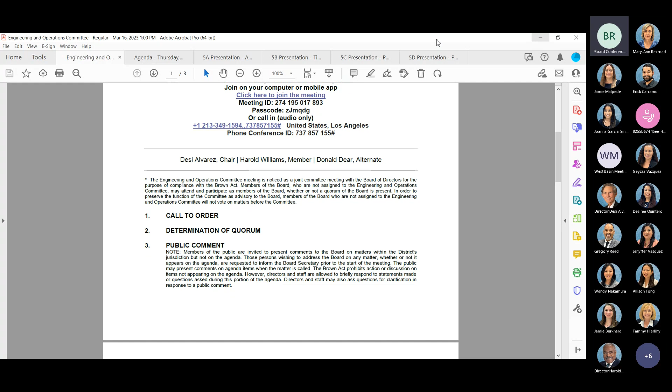Okay, and I do want to acknowledge that we have Mr. Greg Spiker from PV Golf Club here today, and he's prepared to make a public comment. But he's also anticipating a couple of his colleagues to join us today. So if it would please the committee, perhaps we can postpone those public comments for the agenda item that they're here for, which is the PV lateral recommendation to award.

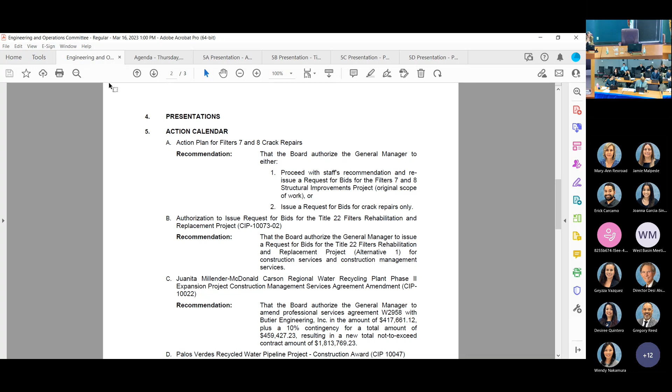Mr. Chair, yes. I'm sorry, but I'm not able to hear you clearly. Oh, okay. Can you hear me better now? I don't know what the speakers are doing. Okay, I will speak louder. Would you speak into the mic then? I don't know. Like this? Speakers in the room? You're supposed to work. We don't have speakers in the room, so that's only for online. Oh, these are online? Oh, okay. So then I just have to speak louder. Fair enough.

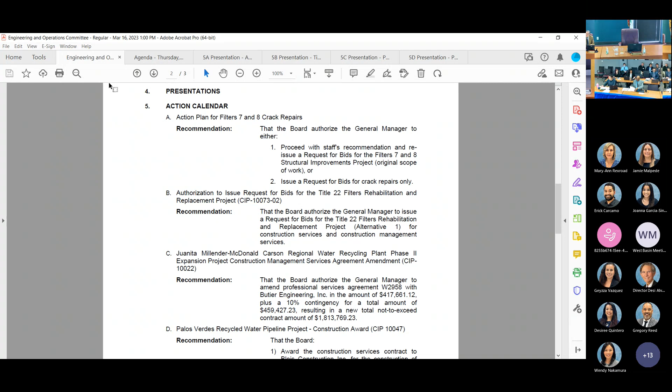With that, we'll move forward with the Palos Verdes Recycled Water Pipeline project, the construction award, and our General Manager will introduce that item. We're going to item 5D, is what we're saying? Yes. Okay, and I don't see Mr. Ralph Felix here, but we'll go ahead and move into that item. So we have Veronica Jovia, our project manager for this project, who will give the presentation as well as the recommendation to award. So please, Veronica.

Yes, good afternoon, Chairman Alvarez, members of the committee. I'm here to present an item that you can find on page 153, item 5D. This is for the Palos Verdes Recycled Water Pipeline project. Please note that this particular board item has 3 action items on it. One will be for the construction award of the pipeline. The other will be to request an increase for budget, and the third will be basically the approval for the advertising of the pump station project.

On past meetings, we have been presenting these. Sorry, what page are you on now? It's page 153 of your packet. 153? Yes. Thank you.

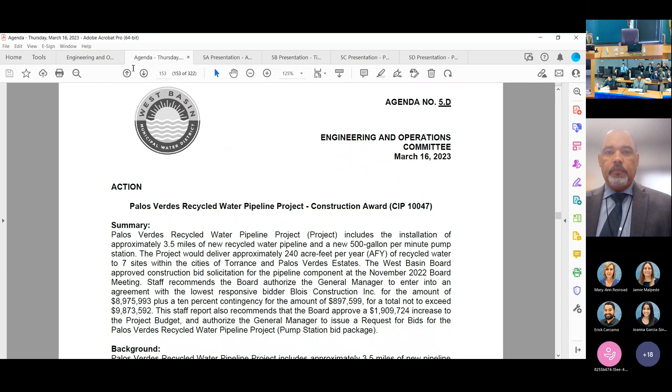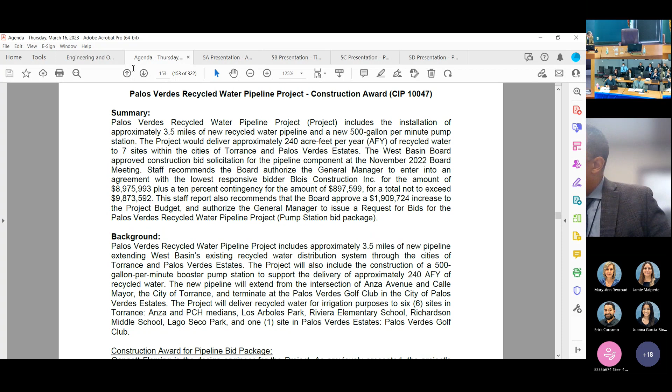And during the past presentations that we have done as part of the board committee, we have been presenting some of the logistics that went through the bidding process. So on these items, to make sure that we move on time, I'm just going to concentrate on the results and the following action items. However, if there are any questions, please feel free to let me know, and I can go back to those logistics.

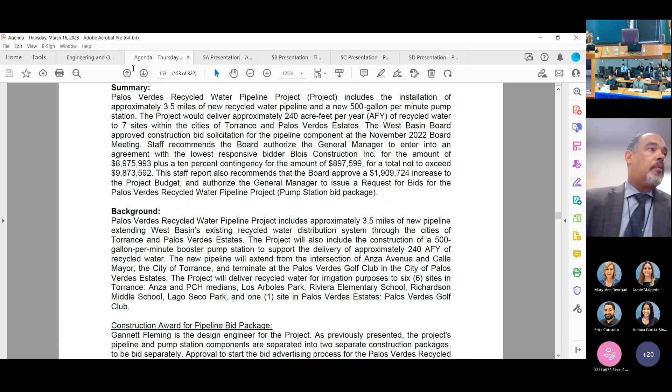We went through the process of obtaining bids on February 14, 2023, and we received 3 bids that you can find on page 154, table A, which summarizes the 3 bids that were received. The lowest responsive bidder is Blois Construction at $8,975,993.

Their bids were reviewed and checked for any errors, and they were deemed a responsive bidder. We also reviewed the other bidders' items and found that College & Sons was missing the local business enterprise form, and therefore they were deemed non-responsive. The $8.9 million project that Blois Construction produced is still

$1,736,113 greater than the original construction engineer's cost estimate, which was $7,239,880. So with this, I'm going to ask you to go to the PowerPoint presentation and go over some of the items the committee asked us to look at last time, then go back to the board item to continue this conversation.

The presentation can be found on page 158 for those in the audience. This PowerPoint presentation goes over the items our committee asked us to review during the analysis of why the cost came in higher than estimated, as well as some of the other funding mechanisms we have for the project, and other considerations to see if we could cut budget.

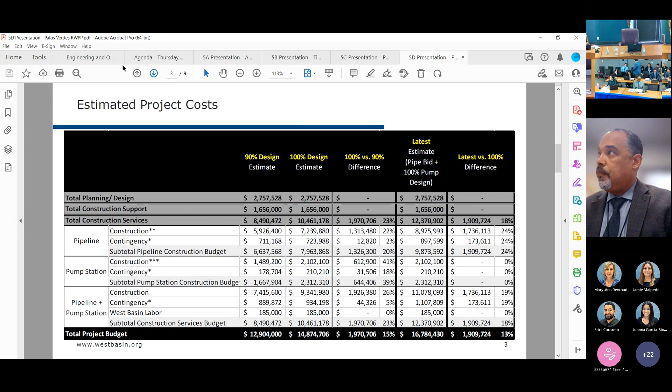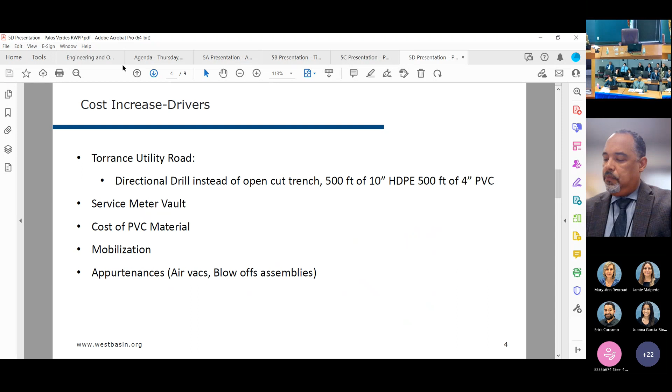Moving forward to the next page, please. We also took a look at other considerations for how we could reduce or cut some of the cost of the project. We looked at the laterals coming up from the main pipeline that takes water from the existing recycled water line to the end point in Palos Verdes Estates. We looked at two laterals, 4-inch service lines, which together cost a little over $800,000 just taking into account the PVC pipeline. These costs do not include mobilization, as mobilization percentages are also a component of those.

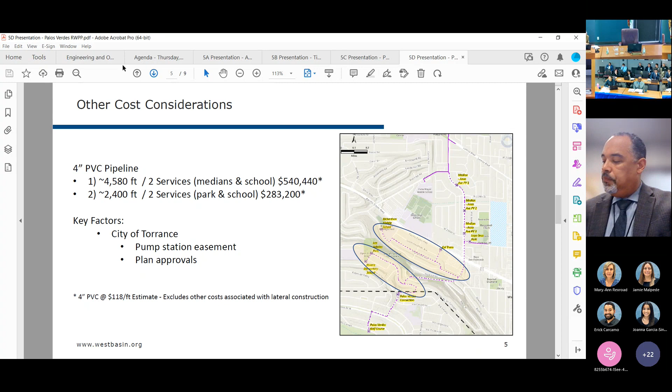However, staff doesn't recommend cutting these laterals, as we went through a couple of years of discussions with the city council and members of the community to sell this project. You might remember we had issues with the pump station location, which was moved from one location to another, and the community came to an understanding of this being the project. This was also approved, along with the pump station easement. Cutting out these pipelines could cause issues finalizing approvals from those cities when we get to the final encroachment permit the contractors will perform, and the communities might be upset if we don't install those services. There are 4 services in this, like parks, medians, as well as schools.

Next slide, please. So looking at the different sources for the funding, this particular table shows the different sources we have acquired for this project, ranging from grants, loans, third-party agreements, as well as West Basin input.

Looking at the 1.9 million cost increase that occurred in November 2022, and having that approved, there's still that $1,909,724 delta to match up to the $16.7 million total project cost. So in order to move forward with and approve the project, we are going to be asking this board meeting to allow for increasing the total budget of the project.

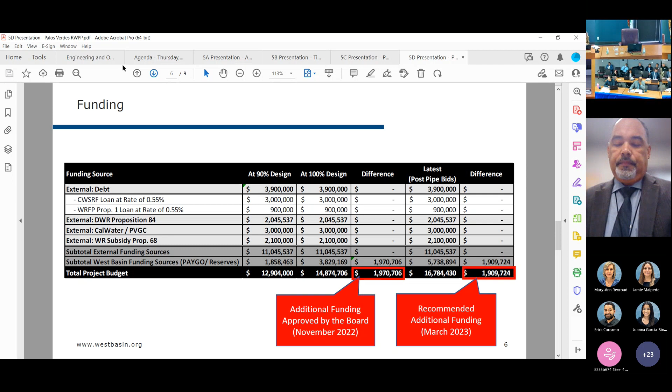Next slide, please. Now moving forward regarding where the rest of the project is at. The pipeline construction is expected to be awarded this month, March 2023. Right now the pump station is at 100% design submittal. We are reviewing these plans, and the City of Torrance, as well as LA County Flood Control District, have those plans and they are being reviewed. With this, the next step will be addressing final comments, preparing and assembling the bid package, and being able to go out for bid.

There is a new process the district has started, the gate process, in which the board, back in September I believe, asked staff to bring items that are ready to advertise for board approval in order to advertise them. What we're presenting here is we're asking for permission that once we finish this 100% design submittal review and finish the bid package, at this board meeting you allow us that permission so we can start advertising as quickly as possible once the bid package is assembled, to eliminate any additional meeting that could delay the project another month. With this, can you go to the next page?

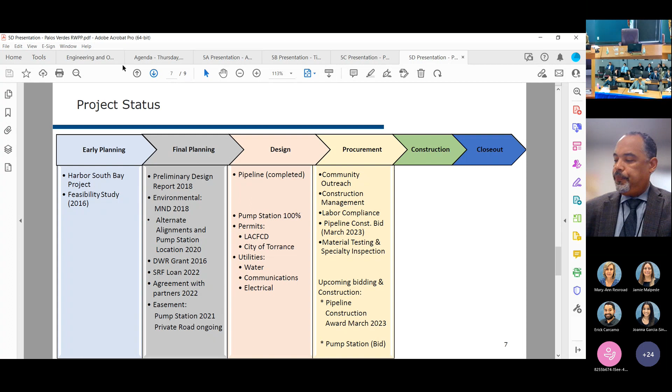Thank you. This will basically put us on a schedule in which the pipeline will be able to start to be awarded in March and have a construction notice to proceed around early May or late April, as we still have to go through the contractual documentation, getting the agreement signed, insurance, all the documentation in place. With a construction duration of 9 months, that will take us straight to the end of January of next year for project completion.

Now, the pump station - hoping that the City of Torrance and LA County will be able to give us final comments or approvals at the end of this month. We'll be able to address those final comments, assemble the bid package in April, and start the process early May. Again, we are heavily dependent on those permitting agencies, but because in the past they have taken a while, we would like to ask the board to allow us that once we have these comments, address them, get the bid package assembled, and start that gate process procedure. The pump station construction duration is approximately 8 months, which will take us to early spring of 2024 for project completion. With this, we can probably go back to page 156.

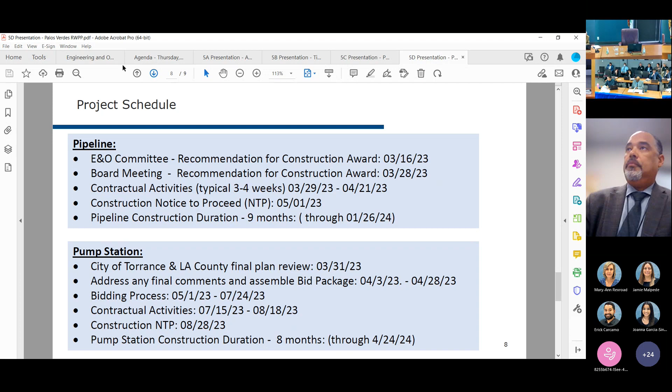So I can read the recommendation. The recommendation is that the board: 1, award the construction services contract to Blois Construction for the construction of the Palos Verdes Recycled Water Pipeline Project, pipeline bid package, in the amount of $8,975,993, authorize the general manager to execute the contract, and approve a 10% contingency in the amount of $897,599, for a total not-to-exceed contract amount of $9,873,592. Action item number 2: approve a $1,909,724 increase to the total project budget, for a new estimated project budget total of $16,784,430. And action item number 3: authorize the general manager to issue a request for bids for the project's pump station bid package. With this, I conclude my presentation.

I'll be happy to open up for any questions.

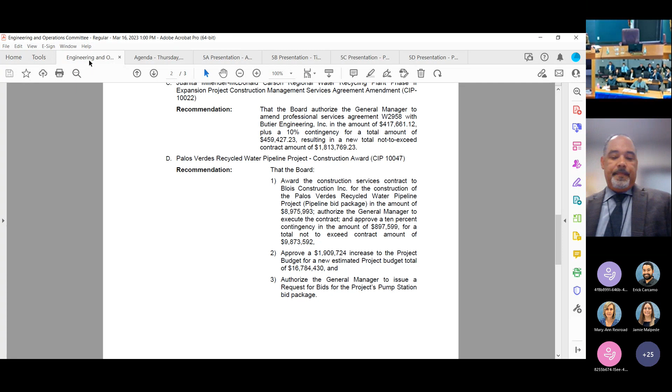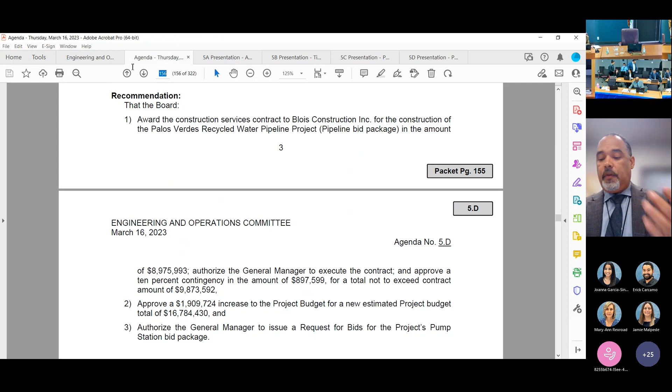Thank you, Ralph. The next item is 5A, the action plan for the Filter 7 and 8 crack repair. Mr. General Manager, would you like to introduce this item? Yes. We've had several discussions in committee regarding the stability of the Title 22 filter basins, specifically 7 and 8. We've had an engineering report indicating that the seismic stability is at risk from a certain seismic event.

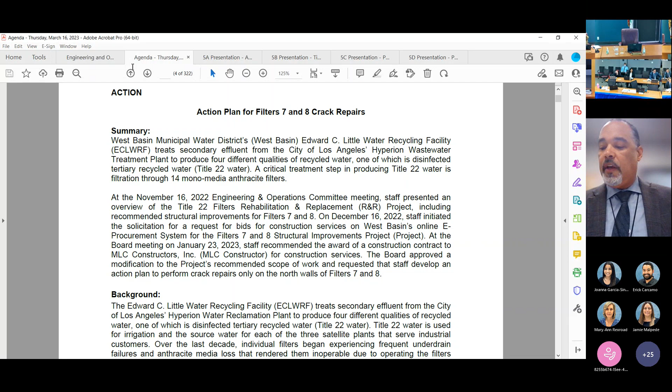And we've subsequently taken that basin offline to mitigate that risk. But then we received other direction from the board to restore the basin to operation, which we have rescinded—the directive to Veolia to remove that basin from service.

We also recommended proceeding with certain seismic retrofits that were recommended by the consulting team who did the evaluation. But we also received direction from the board to not award those retrofits, but to come back with an action plan for crack repairs. And so that's what this item does.

Along the way, we consulted with Carollo, the engineer of record who did the seismic evaluation of the walls, and got some additional information we want to bring forward for your consideration, in addition to the crack repair plan that was asked for. With that, I want to hand it over to our Executive Manager of Engineering Operations, Barkev Mazurlian, to provide more information about this item and the two recommendations.

Thank you, Greg. Chairman Alvarez, board members. We can start with a quick background—I think Greg provided a good summary. But just a quick background: our Title 22 water filtration basins are at the Edward C. Little facility.

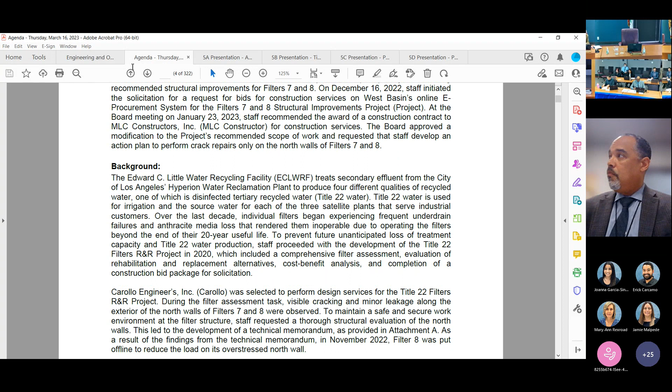That Title 22 water is used for irrigation and as source water for the satellite plants that serve the refineries. So the water that runs through the filter basins accounts for 52% of the entire water we produce—directly from the filter basins and indirectly for the other 48%. So out of the 37,000 acre-feet per year of water West Basin produces, close to 20,000 acre-feet is directly reliant on the operation and performance of the filter basins.

And that water goes out of Edward C. Little, through the distribution system, and serves close to 500 customers—350 customers within West Basin's service area in Torrance, and another about 140 customers in the LADWP.

So the filter basins, 14 of them that we have, are really crucial for us to meet demands of the West Basin Recycled Water Program. Over the last decade, individual filters began experiencing frequent under-drain failures and media loss that rendered some of them inoperable, mainly because they're beyond their 20 years useful life.

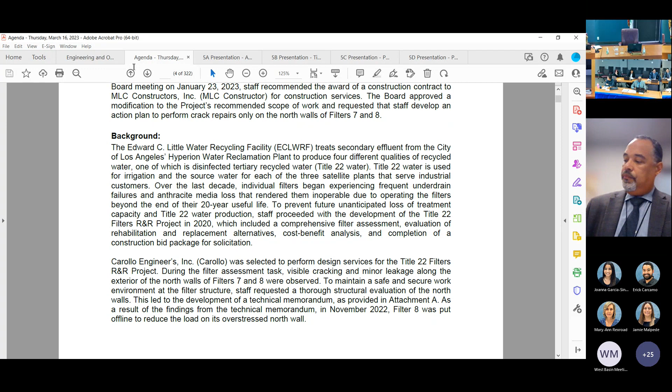What it also included was a structural analysis of the walls along the north wall along filters 7 and 8. So if we can go to packet page 89, on the accompanying presentation you'll see an aerial view of filters 1 through 10, with an indication of where filters 7 and 8 are.

Filters 7 through 10 were added to the existing structure at the time of filters 1 to 6, as part of the phase 2 expansion of our Edward C. Little facility. So the north walls on filters 7 and 8 were originally designed as non-water-bearing walls—they weren't designed to hold water against them.

The structural analysis our consultants performed was really triggered by observations we and the consultants had when we conducted site visits for the overall rehab project. We noticed visible cracks and some leaking at the expansion joints. So the structural engineers conducted a finite element analysis to verify the degree of the structural deficiency.

As part of this analysis, they looked at multiple load combinations under various scenarios—under normal operation, under flooding conditions, and under seismic conditions. Findings from that structural evaluation revealed structural deficiencies in the walls. The evaluation steps, findings, and recommendations are all attached to this memorandum, to this staff report. The memo is on packet page 7.

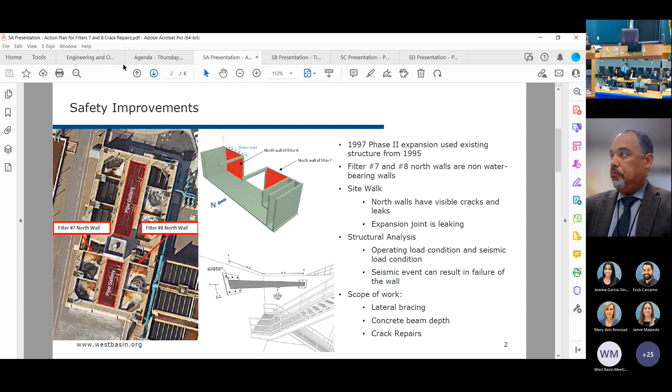Next page please, packet page 91. These photos were taken this year, about a year and a half after the previous photos. During the site visit, staff witnessed that those cracks noticed earlier were noticeably larger than before. The two most apparent cracks previously seen on top of the wall were now stretching to inside the basin along the quarter-sized hole you see in the middle photo. These cracks appear to have doubled in width over the last year and a half.

As follow-up to the board's request, staff began developing an action plan for a modified cracks-only scope of work. We connected with the structural engineers to formulate a revised and appropriate scope for repairing the cracks only. We asked some questions, and in response, the structural engineers provided responses, which they summarized in a letter attached to the report on packet page 94.

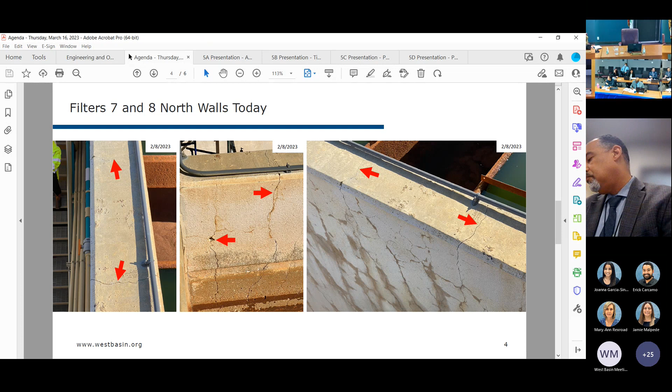There's a letter there from the structural engineers. I'll try to summarize key notes from the letter. The structural engineers say yes, crack repairs do reduce the likelihood of those cracks expanding and allowing more water to flow through and cause spalling. However, they indicated that although it is a good idea to repair the cracks, it is likely they will return if the wall is not supported or stress reduced. The crack repairs will remove the risk of leaking but will not provide structural support to the wall. If corrosion has already begun inside the walls, crack repairs will not stop it. Simply filling the stress cracks with mortar does not address the overstressed condition of the wall.

In summary, the structural engineers indicated that although it is worth performing crack repairs without any other recommended structural improvements, like the bracing or the beam, the cracks will reappear. When reinforcement in the wall is overstressed with static loading, they indicated the wall will likely fail when an earthquake introduces dynamic load.

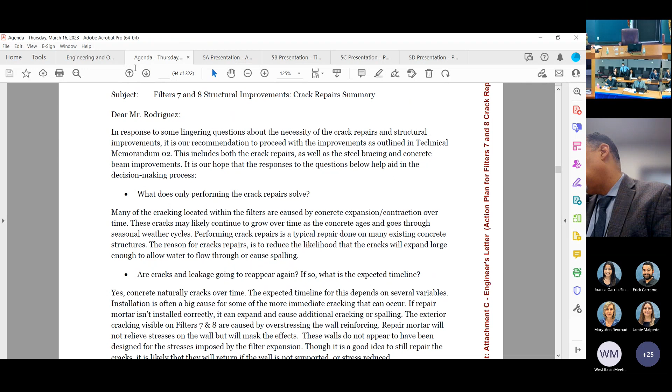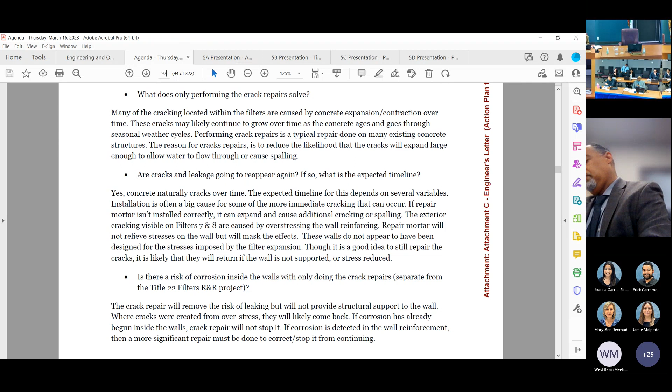What could happen if the wall fails? Let's turn to packet page 92 for the last slide of the presentation. Aside from potential injury to crews working in the area, structural failure of the north wall could result in the flooding of the pipe gallery shown there on the right of the slide.

Similar to what occurred at Hyperion in July 2021, the flooding of below ground level pipe galleries could cause significant damage to critical infrastructure, including actuators and blowers that are needed for the operation of the filters. A photo of the two blowers we have for the first 10 filters is shown on the left. Those two blower systems are located just north of the wall in question.

In a flood scenario, our contract operators, Veolia, estimate that production of the Title 22 that serves those 500 customers of West Basin could be reduced to 0 to 2.75 MGD, million gallons per day.

Based on the information provided to staff today, including the latest clarifications provided by the structural engineer, staff still recommends performing the original scope of work, which included installation of steel bracing and the added concrete beam depth, as well as the crack repairs, at a cost ranging between 160 to 180,000.

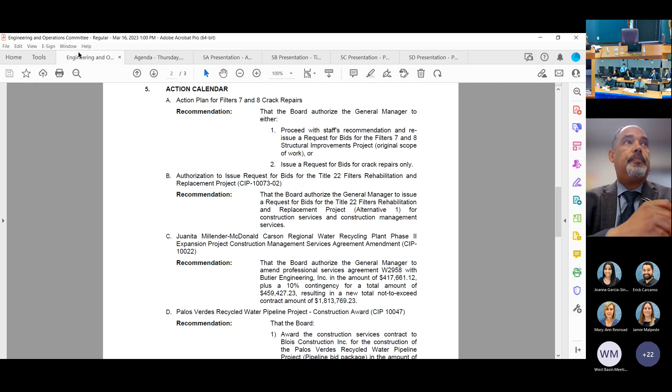I remain unconvinced. I do not see any real justification in the supplemental letter from Corolla, besides reiterating what they previously had said in their original report. The likelihood of a catastrophic failure due to seismic condition is very, very small, and that it would be catastrophic, that you would lose all of the water so that you would flood the entire pipe gallery, is almost non-existent.

And I always like to use the analogy, you can always have a 747 crash into a nuclear power plant—albeit the probability of that happening is almost non-existent, but it cannot be denied. I just think that this is overkill for the issue being addressed here. I think there are much bigger issues that we need to address before we continue to spend money.

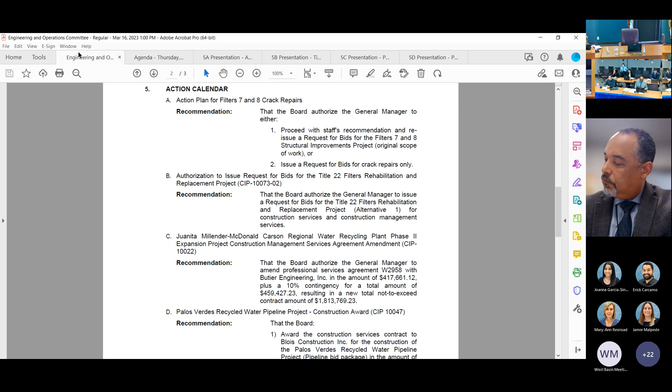I agree with Director here that it is not that much money in this case, compared for example to the amount of money we just agreed to spend on the Palos Verdes recycled water line. But it's nonetheless money that can be better spent elsewhere.

So my recommendation is that we proceed with option number two, which was the direction that had previously been given, both at this committee and at the board level. That this came back with two recommendations is very frustrating to this director. So that's what I would move.

And what would you like to do, Director Williams? I'd like to move staff's recommendation based on the information received today. So I cannot support your recommendation. So you send it to the board without a recommendation? Yes, move this forward to the board without a recommendation. That makes it easy.

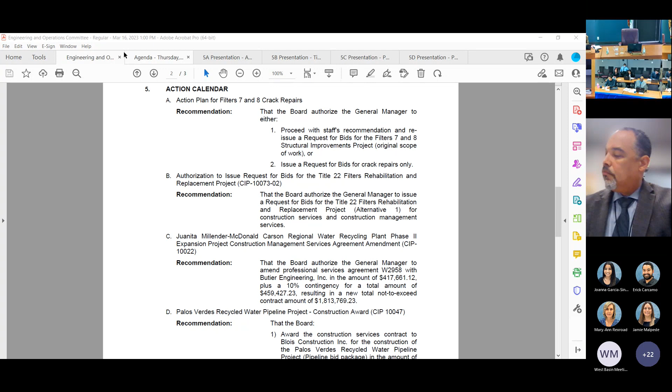Okay, we will move on to the next item, which is the authorization to issue a request for bids for the Title 22 filter rehabilitation replacement project. Mr. General Manager, please introduce this item.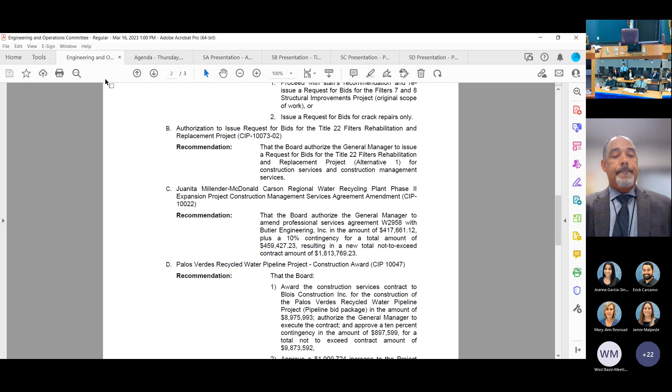Okay, thank you, Chair Alvarez. The committee may recall a presentation, an info item that talked about the Title 22 filter project at large. That's when we first began the discussion around the previous item that we just decided on.

This committee also asked the general manager to follow a practice of asking for permission to bid for construction contracts, and I've incorporated that into my practices at the district. It's not an admin policy—I do have the policy entitlement to issue requests for bids—however, I'm happy to accommodate the request of this committee. So that's what we're doing here.

This particular project, as I think was indicated in the recent discussion for item A, is vital to the overall service of our water recycling to about 500 customers. This project will do many things that help us meet the service levels expected by our customers—for example, the Palos Verdes Peninsula, should they receive recycled water through the PV lateral, and the city of Torrance that currently receives that water, as well as all of the other irrigation customers, not to mention our commercial customers such as the refineries.

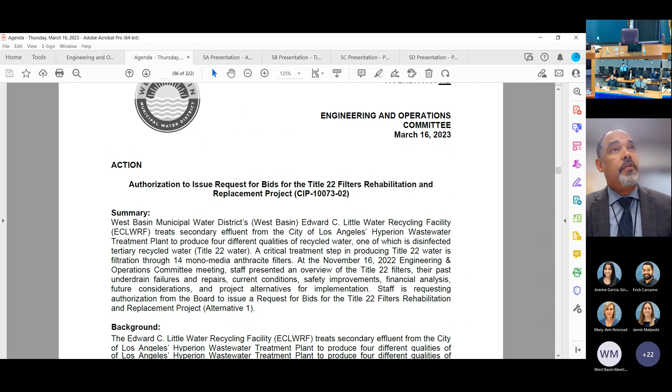And to be able to answer any questions you may have beyond the presentations that we've given in the past meetings.

Wendell: Thank you, Greg. Good afternoon, Chairman Alvarez and members of the committee and board. You can find a copy of the staff report on page 96 of your agenda packet and a copy of the presentation on page 102 of the agenda package. I'm going to go over the staff report. You've seen the presentation several times, but if you would like for me to also go through the presentation, I will do that.

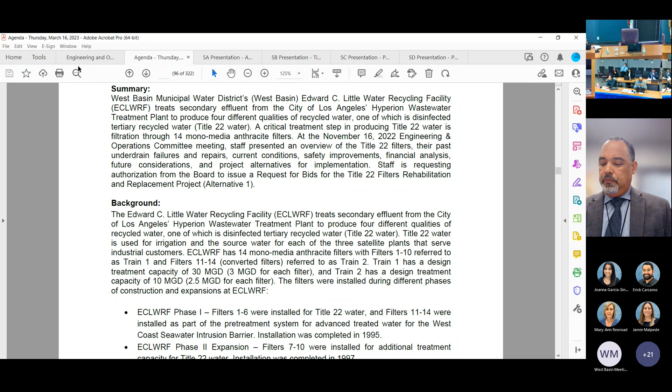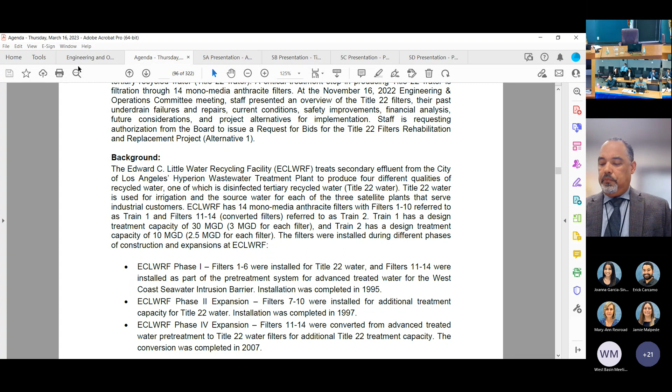Just some background about this particular project. Beginning in 2013, the Title 22 filters began to experience underdrain failures that resulted in media loss that deemed them inoperable at the time. Staff performed in-house repairs to provide a quick turnaround and bring the filters back online. But unfortunately, the repairs only extended the useful life of the filters by 4 or 5 years until they failed again. Having filters offline impacts the production of Title 22 water by reducing the overall treatment capacity. Currently, ECL has 5 filters offline due to some type of failure. When demand exceeds the overall treatment capacity, potable water is supplemented as makeup source water along the treatment process to meet these demands.

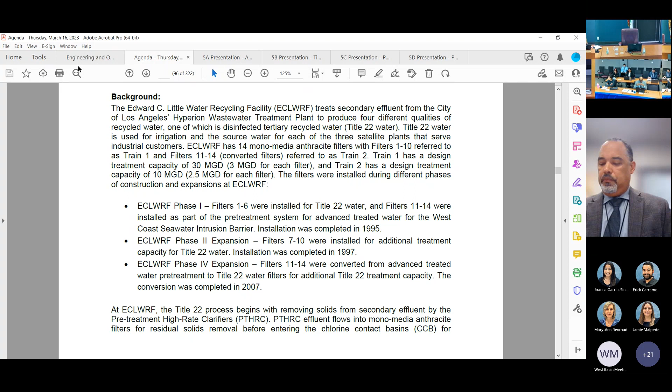In 2020, due to the frequent underdrain failures, the Title 22 filters R&R project was initiated, which included a condition assessment of the filters, an evaluation of R&R alternatives, a cost analysis, a structural analysis, and a construction bid package for solicitation. This package solicitation was completed in June of 2022.

Staff has developed 2 alternatives for consideration. Alternative 1 proposes to perform R&R on all 11 filters which have had no prior repair, while alternative 2 proposes performing R&R only on the 5 filters that are offline. Although alternative 1 has a higher initial capital expenditure than alternative 2, the non-economic benefits of alternative 1 include increased reliability, customer service, and operational flexibility while limiting major future repairs and interruption. For this reason, staff is recommending the implementation of alternative 1.

It is expected that by implementing alternative 1, the amount of potable water supplement used will be reduced between 25 and 75%. A reduction in this range will allow for the potential project to be paid back between 3 and 7 years. At this time, we have completed all tasks designated for the project to have the construction bid package ready for solicitation.

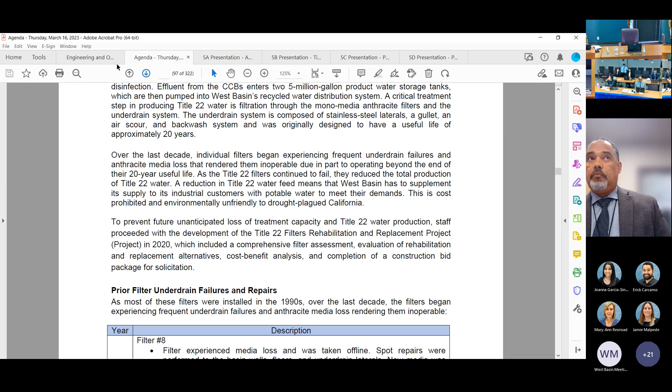Director Dear, do you have any questions? No question. Director Gray, do you have any questions or comments? Williams: I would have, my question would be to the general manager. Direct him. Where are you on this?

I support the staff recommendation. I think that the reliability is necessary to maintain continuity of service over the next period until we transform the facility for other purposes. And certainly we'll be having more conversations around that in the coming days and weeks as a board. But also this question of service levels to our customers, because this is an integral part of being able to provide high quality water to our irrigation customers, to our refineries, and ultimately our reverse osmosis and microfilter systems that also serve Chevron.

West Coast Barrier takes in reject water into these systems as well. And so our ability to really process all of that water is going to help all of our operations become more reliable going forward. I believe the committee and the board have a goal to ensure that we're going 100% recycled water into the barrier. And this is an important component of that overall process to be able to do so. We have a lot of reasons why we want to rehabilitate all of these 11 filters, and I recommend that we do so.

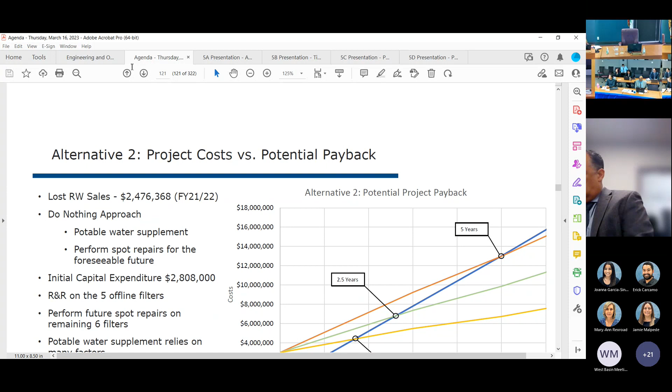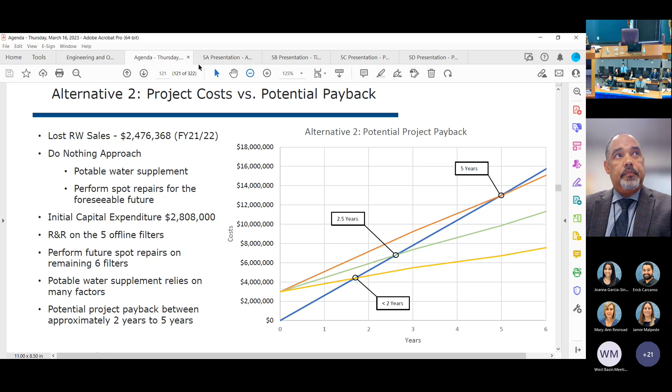And 120 — one applies to alternative one, the other to alternative two. In both cases, it shows a do-nothing alternative, shown in blue. The do-nothing alternative is basically to continue maintaining the plant for the next couple of years until such a point as we know with some certainty what we're going to be able to do. It's the least expensive of these alternatives. It is doable — you can keep that plant running. It is not impossible. It's what I call the bailing wire approach sometimes, but sometimes that's what you have to do until you can have some certainty as to the amount of money worth investing in facilities.

So I'm not supportive of either option. I'm supportive of doing nothing at this point, continuing the maintenance required to keep the facility operating until such time, hopefully resolved in the next couple of years, as we know what direction we're finally going to take. We have discussed this quite a bit, and following all of those discussions, it always comes back to: we need to be careful about how much money is being invested.

So in the interest of being wise and prudent with our investments, I think at this time doing nothing is the appropriate approach. That would be my recommendation — to table this until we know how much water, if any, and what our commitments are going to be to that plant.

And Director Williams, what's your position — do you want to recommend that or not? Based on that, and based on the fact that we have not heard from Mayor Bass as to where she is on the recycled water program — whether she'll maintain the direction Eric Garcetti was moving in, or has another plan — we haven't heard that. Is that correct? That is correct. So if we take the position of doing nothing right now, what harm would that create for us in the next 2 years?

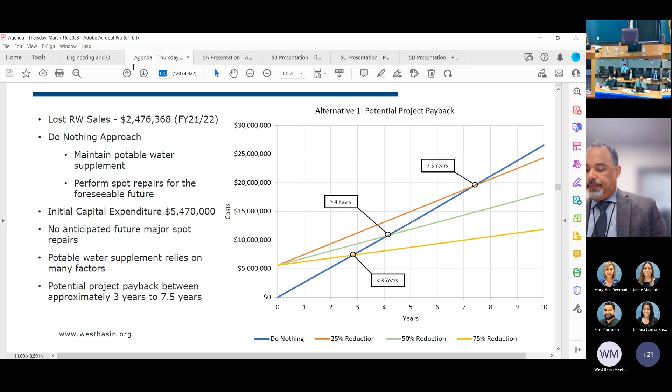The Juanita Millender-McDonald Carson Regional Water Recycling Plant Phase Two Expansion Project Construction Management Services Agreement Amendment—that's quite a mouthful. Mr. General Manager, please introduce that item, and so that I can actually speak, I'm going to get some more water.

Thank you, Chair Alvarez. We have Kevin Cullen, who has been managing this construction project for, well, I'm not quite sure how long the construction's been going on, but I know Kevin has been doing a fine job. I apologize for not being with the committee in the last session when Kevin provided what I understand was an excellent presentation as an info item about this topic. So now we are here today to talk about the actual change order. I'll turn it over to Kevin now.

Thank you, Greg. Good afternoon, Chairman Alvarez, members of the committee and board. As Greg mentioned, this is a follow-up to last month's presentation where I highlighted the action item that was going to be upcoming and an overview of the project budget.

I'll start with project highlights. Since last month's presentation, we've continued to make good progress on site.

On the left-hand photo, you can see the 6 custom engineered microfiltration skids have been installed, as well as their module racks. The photo on the right was from February 27th after one of the other recent rain events. I was out on site this morning and ironically, it looks a little bit the same. The site is severely impacted by the amount of rain we've had, and it seems the soil percolates the water a little less with each rain event, but nonetheless, it is subsiding.

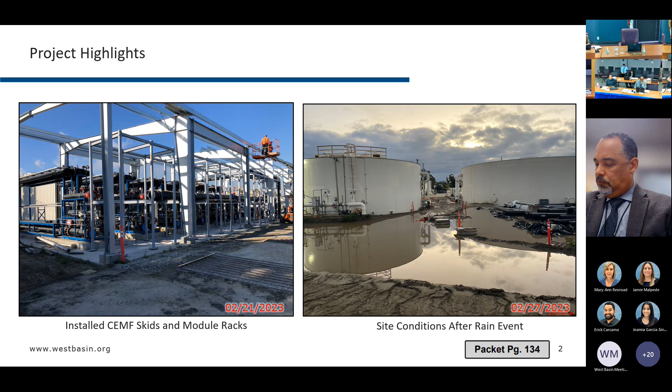On the left-hand photo, we've begun, as of early March, connecting the CEMF skids to the yard piping. Skid 1 is now connected to the effluent piping. On the right-hand side, you can see continued work on the new perimeter wall. On the south and west sides of the plant, it's a 4-foot high CMU wall with chain link fencing and privacy slats. One more highlight for the project that's not shown here is

next month at AWWA's spring conference, myself and a member of the Hazen and Sawyer team will be co-presenting together and highlighting the project.

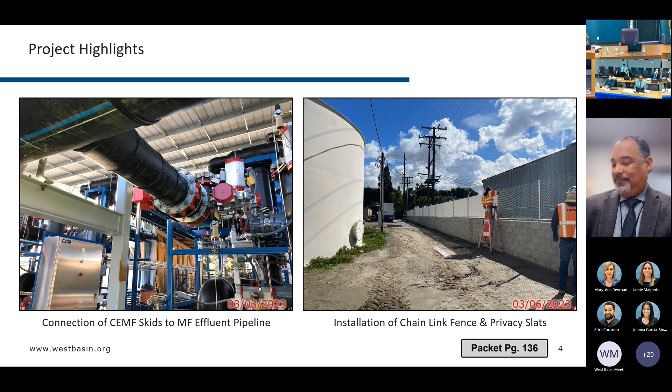Bravo, excellent. When is that now? That's April 5th in San Diego. Which one is that? This is AWWA's spring conference. Oh, but that's the Cal Nevada section? Yeah, yeah, okay, I think it's the second booth.

Here's a standing slide we have on the status of our project labor agreement. As a reminder, for the PLA, we have 2 tiers of workers. Tier 1 is local residents, those US zip codes that fall within the West Basin service area. Tier 2 is those that fall within LA County. Then we have a category for at-risk workers, for residents that live within 10 miles of this building who meet 2 of the following criteria.

Our goal for tier 1 is 30%. The contractor has made requests to the union halls, and through that we have exactly 16.1% of workers coming directly out of the service area, but we have an approved local rate of 35% because the contractor has done the due diligence to get those workers. Unfortunately, the specific union halls for the trades they need haven't been able to provide any more, but they continue to check in to see if any become available. On the at-risk side, our goal is 5% and we're at 7.5%, doing well there. On apprentices, we are way above the DIR requirement of 16.7%, with about 23% of man hours being provided by apprentices. Next slide.

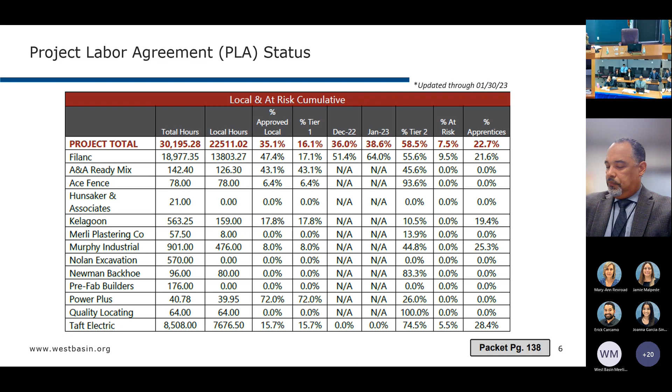Expanded a little more, you can see the breakdown by tier 1 and tier 2, as well as the breakdown by division. Out of tier 1, we have 16.1% of the man hours provided out of the West Basin service area, and almost 60% provided out of LA County. The bulk of the hours making up that 16.1% is coming out of Division 1.

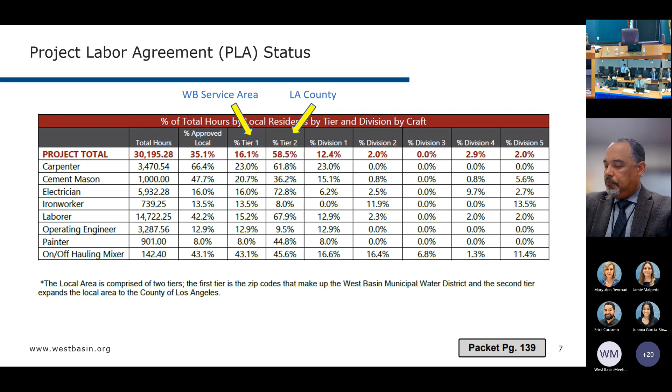As highlighted during last month's E&O, the project is progressing well. However, there have been some schedule delays. Our original contract completion date was April 27th, coming up shortly. We've encountered delays to the construction schedule, including project-wide delays as well as some specific to our custom engineered microfiltration system, which the critical path of the project does go through. The bulk of the delays have been related to procurement, mainly electrical components related to the semiconductor chip shortage. So our new projected completion date is August 31st, which is about a 126-day calendar extension.

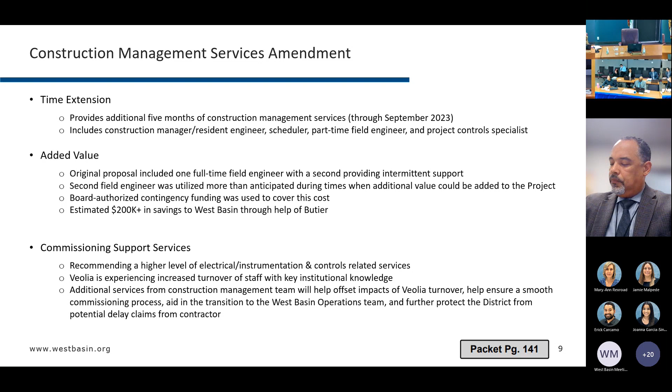Also, there's an added value section of the amendment, covered by the contingency on the original board authorization for the CM agreement. I highlighted some of the added value that Butier has provided to the project, offsetting costs, as well as, per the last request, a more robust discussion on the overall project budget.

I wanted to highlight a few of the change orders approved and executed to date. Change order 1 was for approximately $106,000, strictly for money and no time. The highlights were an added value to the project: two brand new pressure control valves for the MFG pipeline, which directly feed the system we were rebuilding. At the onset of the project, these valves were leaking considerably, and the Veolia team made numerous repairs but they continued to leak. So we procured new valves, which fell under the American Iron and Steel requirements as required by our grant funding agreement.

Other highlights were a realignment of the potable water pipeline that was going to run down the Marathon's private access road, Dominguez Street. With some value engineering from the CM team and West Basin staff, we realigned the pipeline to come out of the road and into the planter, resulting in about a $94,000 deducted change order.

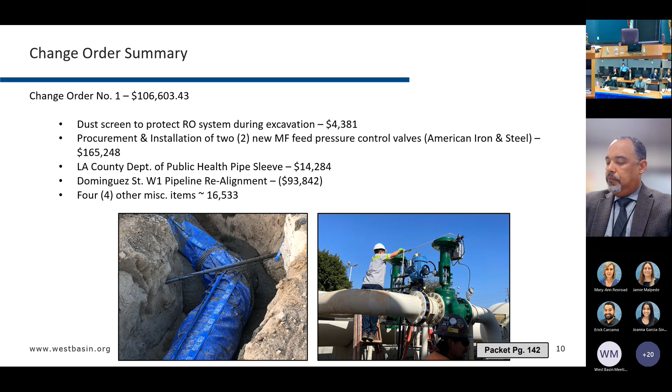Change order 2, a higher dollar amount, was for approximately $379,000. The biggest changes were modifications to the electrical building HVAC design, for two individual systems serving two electrical buildings on site, including both air handling and condenser units with exterior mounted heating for these critical electrical buildings.

Other highlights were an additional moisture barrier required for our chemical containment area. Due to the amount of moisture in the ground, the moisture readings from the concrete were really high, so per the manufacturer's recommendation, we added an additional coating underneath the actual chemical containment coating.

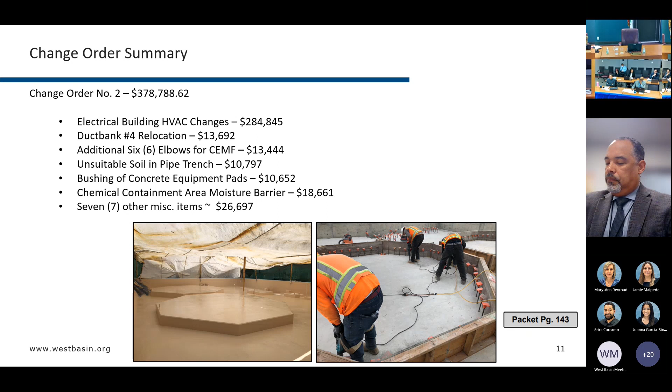Next slide, please. Looking forward, there's another change order coming down the pipe, roughly $400,000. The big item on change order 3, which we're still working to get all the documentation for, is a major rerouting or reconfiguration of the largest duct bank on site.

Slide, please. To bring it all together, here's a summary of the change orders. We have 1 and 2 laid out there; 3 is pending, and there are others still being negotiated that have been requested by the contractor. So we're looking at a total change order exposure on this project of about $1.1 million. On the original construction contract award, there was an approved construction contingency of 10%, approximately $2.1 million. So if you take the delta of the two, the remaining contingency budget is approximately $1 million.

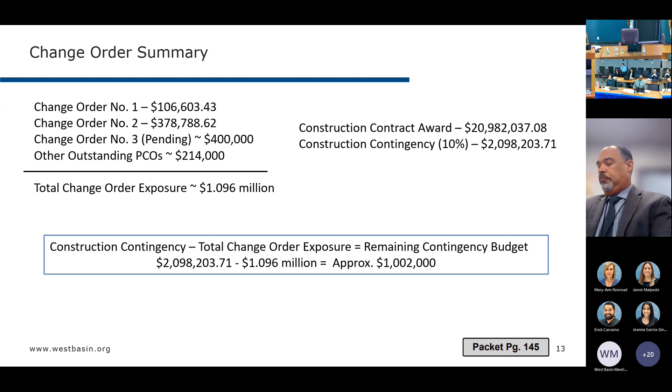As we take the budget into consideration, there are some other opportunities that have been identified for plant improvements. A lot of the structures on site, with the exception of a tank that Veolia recently rebuilt, the MF break tank, most of the structures are pretty aged and are showing their age on site. So we've gone ahead and got some pricing for what it would take to repaint some of the structures on site. We've also been working with our Ocean Friendly Garden program.

West Basin provides landscape designs for other public agencies for ocean friendly gardens. We do not pay for the construction, but we have produced a design for the front of the Juanita Millender-McDonald plant. So that's something we can explore also.

Additionally, during the original construction of the plant, a lot of the surplus spoils were spread across the back half of the plant. So the grading is very uneven, and there's essentially a big mound of soil in the back. We can do away with some of that and make the site a little bit more evenly graded as well. Next slide, please.

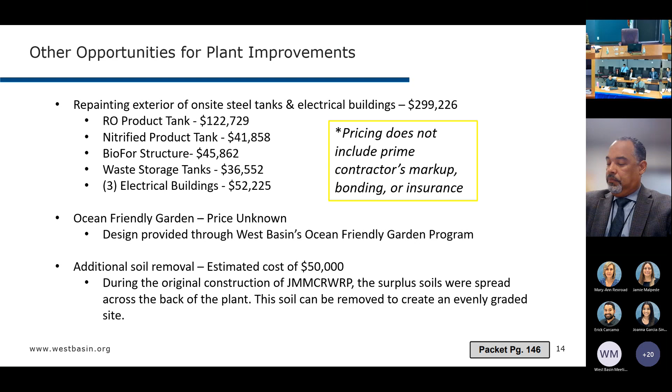To bring the budget discussion back to the start again, this is the total budget for the project. For the CEMF project, we had a total budget of approximately $27.6 million. So if you take into account the current action item before the committee today, as well as that total change order exposure, the revised project projected award across all open agreements on this project would be just north of $27 million. So it still would leave a delta of about $600,000, taking into account all the change order exposure and the action item before the committee today.

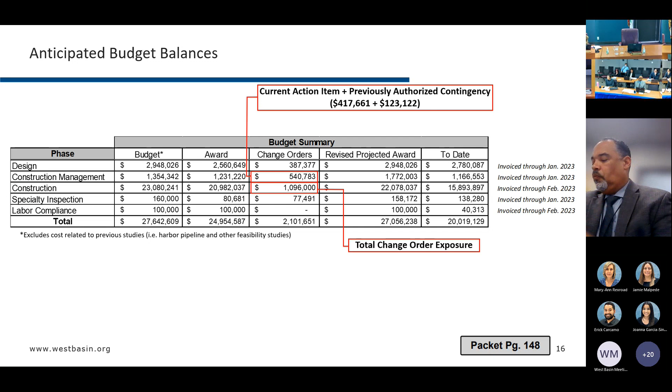Next slide please. So just to review the action items I highlighted last month: today we have the amendment for construction management services, and next month there will be a fairly minor amendment for our specialty inspection and materials testing services with Smith Emery, primarily due to the increased compaction testing and soils inspection we've done on site. We have consumed the budget earlier than anticipated, and we're expecting an amendment of about $30,000.

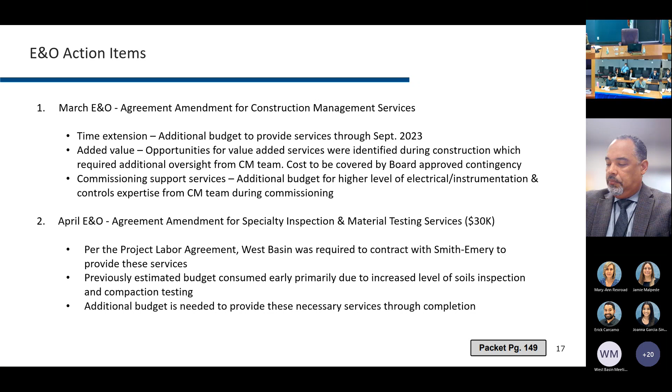Here is a neat 45-second time lapse of the construction of the CEMF. Let's take a look.

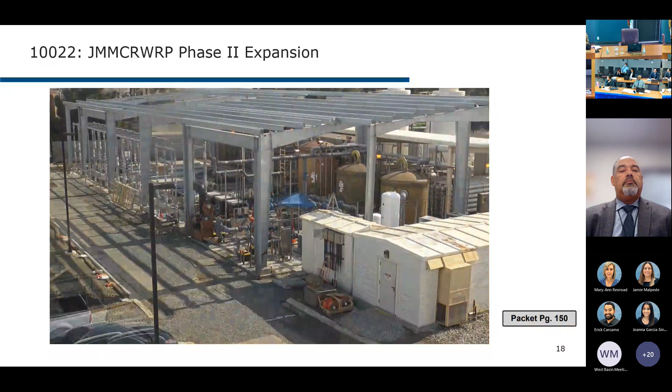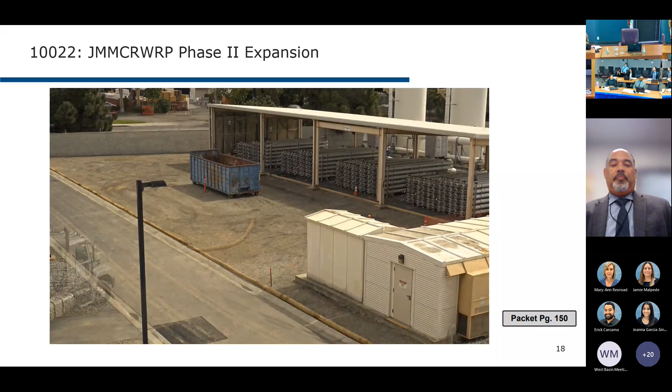Next slide, please. I did want to highlight, just before concluding our presentation, some key dates coming up. Now is a great time to get out to the field and see things under construction and maybe explore some of those additional opportunities for plant improvements. So I would encourage any West Basin staff members, directors that are interested in coming out and taking a site visit. I'd be happy to facilitate that.

Also looking forward is the commissioning and delivery of our first product water. We're projecting that to occur in July, and then a completion ceremony out in September. So that would entail a special invitation to you as board members to come out and see the site this spring and see how that's progressing.

Concludes my presentation. I'd be happy to read the recommendation.

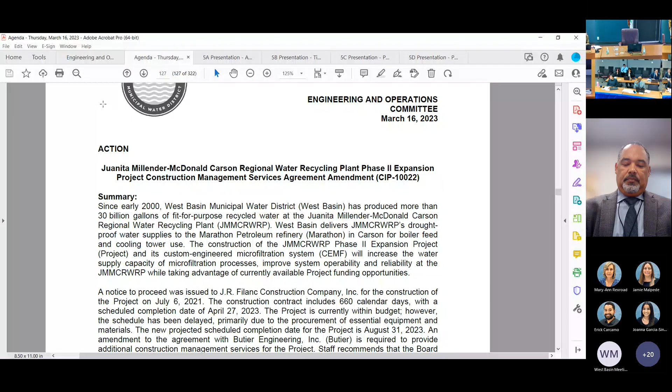The recommendation is that the board authorize the general manager to amend professional services agreement W2958 with Butier Engineering Incorporated in the amount of $417,661.12 plus a 10% contingency, for a total not to exceed amount of $459,427.23, resulting in a new total not to exceed contract amount of $1,813,769.23. I'd be happy to take it.

Thank you. Director Leo, do you have any comments? No, thank you. Director Gray, do you have any comments? She's not on board. Director Williams? Again, to our general manager, he's the chief in charge.

I think Kevin has done an exceptional job managing this project. When I came on board about a year ago, Kevin and I talked about his oversight, specifically regarding the contract services, not the contractor itself, but the consultants helping us manage this project. The key thing being that they're not just wasting and charging the work order for no apparent reason to be out at the job site.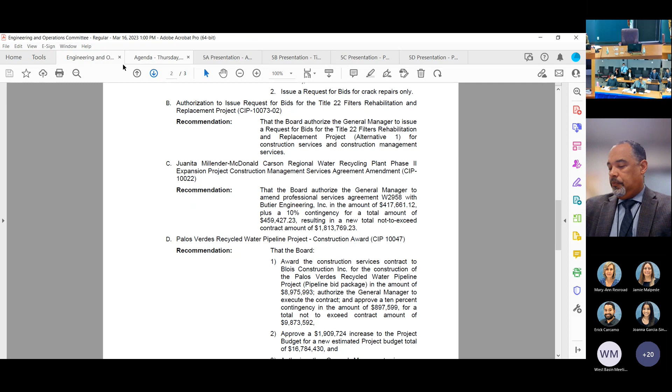A couple of questions on these change orders you talked about, Kevin. Today you went through change order number 1 and number 2, which have been issued, and then change order number 3, which is pending, but most of that work has been done. Not all of it, we have pricing on some, some we haven't accepted. That's the one alluded to in the graphic on the lower right-hand side. Correct, that's a portion of the work in change order 3 that's been completed. We did the Ductbank 7 relocation all on a time and materials basis, so some of that money's already been spent, the change order just hasn't been issued.

So what percentage of that $400,000 you've already committed will you have to issue the change order for? I'd say roughly 60 to 75%. So we're pretty close to almost spending the total amount shown between change orders 1, 2, and 3. I didn't quite follow what the other outstanding potential change orders are, maybe you can walk me through that again.

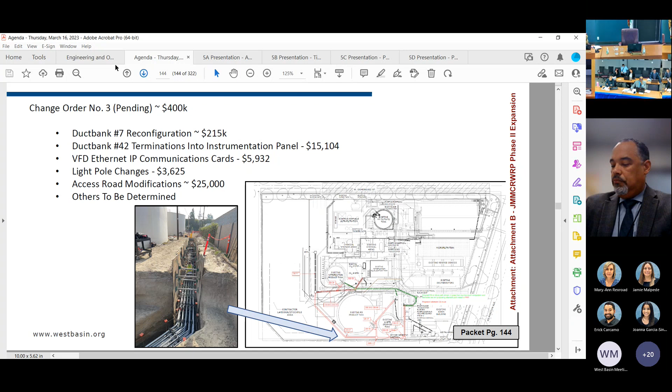You're showing that to be about $215,000 or so. I can highlight a couple off the top of my head, but to be exact we have roughly 60 PCOs, and a lot of them are fairly minor. There's quite a few minor changes and things that need to be revised, so I can bring back a more comprehensive list if you want. If you don't mind, because my question is, are these necessary changes or are these good ideas? The items I listed in the exposure have already been vetted by the CM team, so they're deemed necessary. A lot of the outstanding ones, we're either pushing back on the pricing or seeing where we could do some value engineering. But the intent of my explanation of the exposure was everything that's necessary and planned for.

All right, so we're basically going to be about $1 million in change orders on this, which is about 5%. That's where we stand. So if there's no unforeseen major issue, and there shouldn't be any right now unless something really weird happens, because you're substantially far along on this project, probably 60, 70+%, you're going to be at about 5%, which is pretty good, at least within my guidelines. On the upper end of my guidelines, but good.

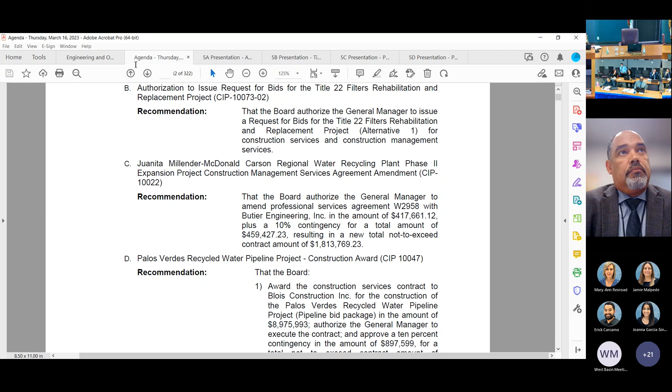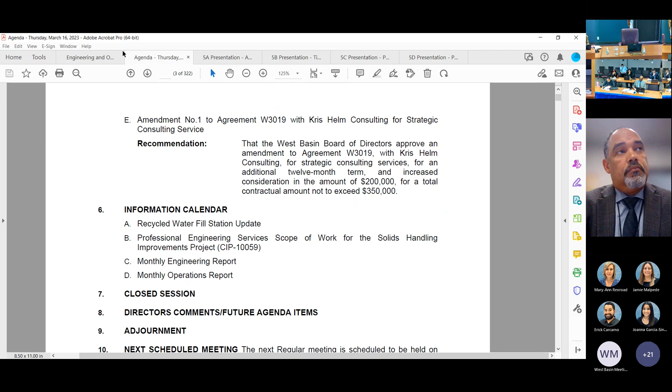There are action items. One action item is item 5E, the amendment number 1 to the agreement with Kris Helm Consulting for strategic consulting services. And then there's all of the information calendar items, which include the engineering and operations reports.

We definitely don't have time for all of that. I think we should just deal with the action item. So we can either terminate the meeting now, which would be my motion, or we can continue and extend this for a little bit longer. What would your desire be, Director Williams? How would that impact your operation? Deal with the action item. I would very much appreciate having the action item heard. Do that. Okay, okay, all right.

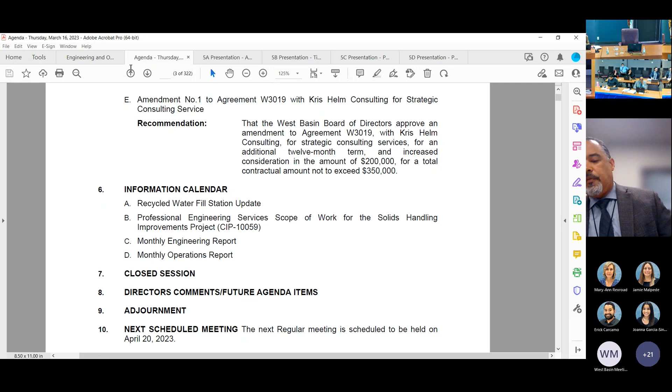As Director Alvarez indicated, item 5E is the amendment number 1 to the agreement with Kris Helm Consulting for strategic consulting services. I'll turn your attention to packet page 168, which provides the staff report summarizing the services of Kris Helm Consulting.

I believe our board has become somewhat acquainted with Mr. Helm and the services he has provided for the district in a few areas. One is helping staff and the general manager develop our future direction of the West Basin Water Recycling Program. Mr. Helm has been very instrumental in relationship building and negotiations with the LA Department of Water and Power, with the Metropolitan Water District, and also with WRD. He's also assisted with the development of the strategy that we're embarking upon.

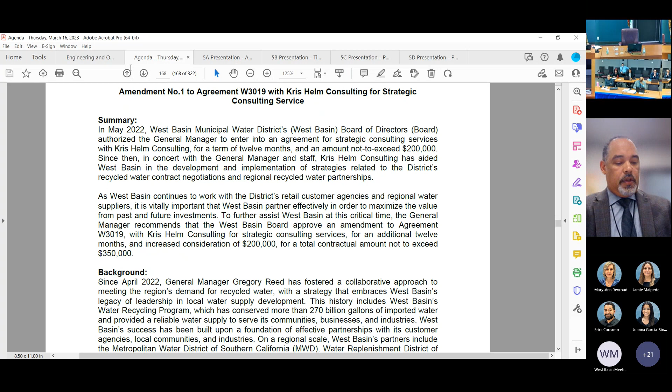He's also helped us in another area, looking at our various water recycling services agreements. He's been able to effectively evaluate the status of those, identify areas of consideration of interest to the board and the district, and help us with developing considerations for future negotiations. I believe you also have heard from Mr. Helm in his briefings to the board as well.

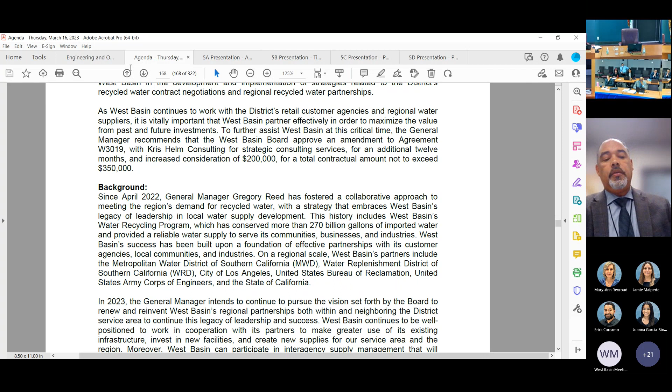What I'm looking to do with this next effort, if this amendment were to be approved, is to continue our relationship building in the area of our water recycling program with LADWP, LA Sanitation, and Metropolitan, developing mutual service commitment agreements, developing and participating in technical evaluations of the West Basin assets and how those can be integral to the broader regional solution for recycled water — basically partnering up with Pure Water SoCal, Operation NEXT, Hyperion 2035 — and also to participate in the environmental review process throughout all of these projects, including our own, as we seek to advance projects to integrate our system into those.

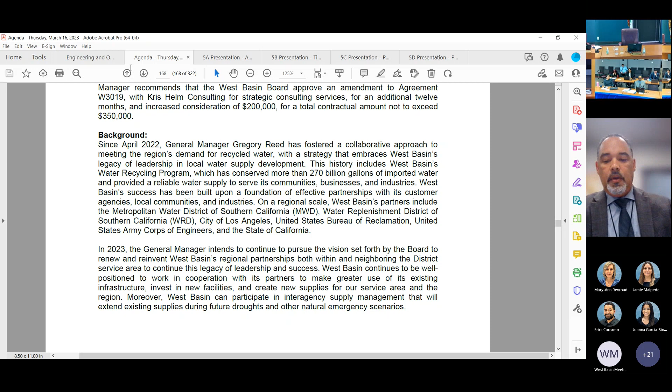The amount of Kris Helm's contract was originally $150,000 for a 12-month period. To date we have spent $140,500, which leaves us a balance of $9,500 through the end of February. I'm requesting an additional amount, an additional period, in the amount of $200,000 for his continued service for an additional 12 months. I believe the contract began at the end of May when it was approved by the board, so that would take us through May of 2024.

So with that, allow me to read the recommendation: that the West Basin Board of Directors approve an amendment to Agreement W3019 with Kris Helm Consulting for strategic consulting services for an additional 12-month term and an increased consideration in the amount of $200,000, for a total contractual amount not to exceed $350,000.

Okay, thank you very much. Director Dear, do you have any comments? No. Williams, do you have any comments? Yeah, I'd like to see this go to the board without a recommendation. My comments are — and I will reserve them for the board meeting — I will not be supportive of this action. I don't see the justification for it, but we will have that further discussion at a later date.